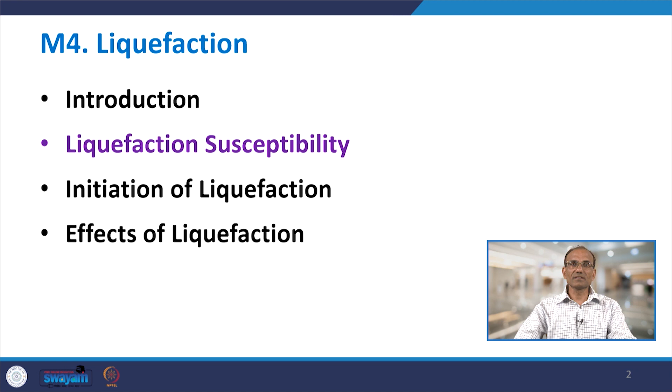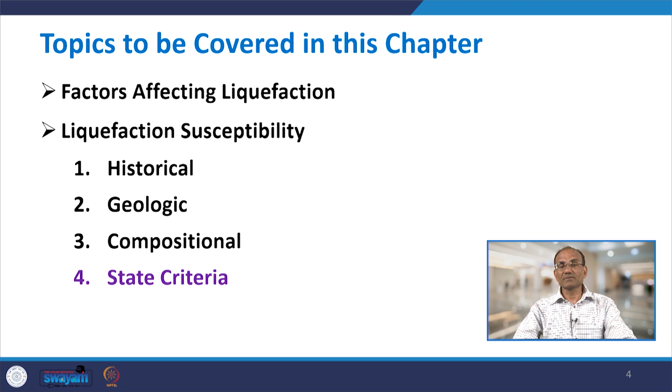We are going to discuss in detail the liquefaction susceptibility, continuing from lecture 32, where we discussed historical, geological and compositional criteria for liquefaction susceptibility. Today we will talk about the last criteria, the state criteria, which is more advanced, based on the state of the soil related to density and stress conditions. Most of what we discuss today is from Kramer's book, and many figures will come directly from this reference.

As for the state criteria, even if a soil meets all the historic, geologic and compositional criteria for liquefaction susceptibility, it is still not necessary that it will be susceptible to liquefaction. It may be susceptible or may not be. Those criteria only give a preliminary indication, but the state criteria will confirm to you whether the soil is susceptible or not.

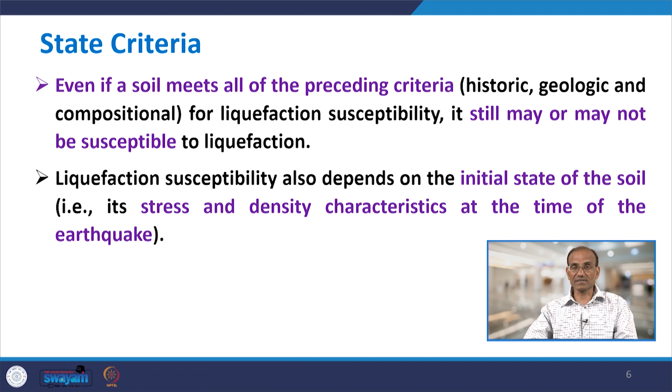Susceptibility does not only depend on the historic, geologic and compositional criteria, but also on the initial state of the soil. Initial state means the stress and density characteristics at the time of the earthquake. Whether the soil is loose or dense makes a difference, and similarly stress conditions will also govern whether liquefaction susceptibility is there or not.

This is the third lecture on liquefaction of soils. Basically, in liquefaction of soils there is generation of excess pore water pressure due to shaking, and this generation of excess pore pressure is very much influenced by density and initial stress conditions. Therefore, liquefaction susceptibility depends strongly on the initial state of the soil, which is related to two factors: stress condition and density.

Unlike other criteria discussed previously, these state criteria are divided into categories, different for flow liquefaction and cyclic mobility, which we will discuss in detail.

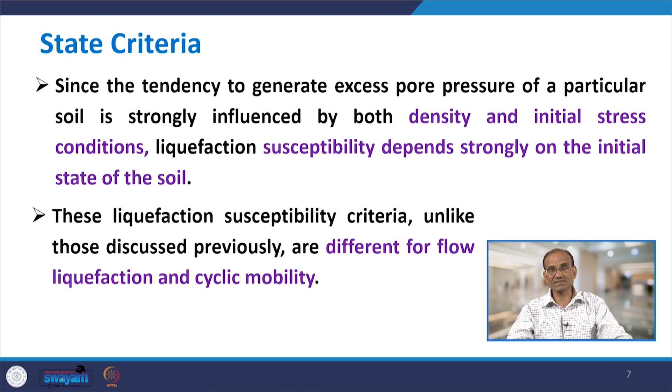Long back, Casagrande in 1936 performed many triaxial tests, which were strain controlled triaxial tests, drained, meaning drainage was allowed so pore water pressure did not develop, on initially loose and initially dense sand specimens. Two types of specimens were taken, one initially loose, another dense. Strain controlled means the maximum value of strain is fixed and not crossed.

The results are shown here: deviatoric stress versus axial strain. In triaxial testing, you may recall the deviatoric stress from when we discussed dynamic soil properties. Normally the triaxial sample is a cylindrical sample. Sigma c, the cell pressure, is applied all around, and in addition, deviatoric stress is applied in the axial direction.

The deviatoric stress is the difference between sigma 1 minus sigma 3, where sigma 1 is the major principal stress and sigma 3 is the minor principal stress. On the y-axis you have deviatoric stress sigma d, and on the x-axis, in the strain controlled test, you strain the sample at different strains. When you increase the strain for the dense and loose samples, the dense sand reaches a maximum peak deviatoric stress value, but the loose sand may not reach as high a peak.

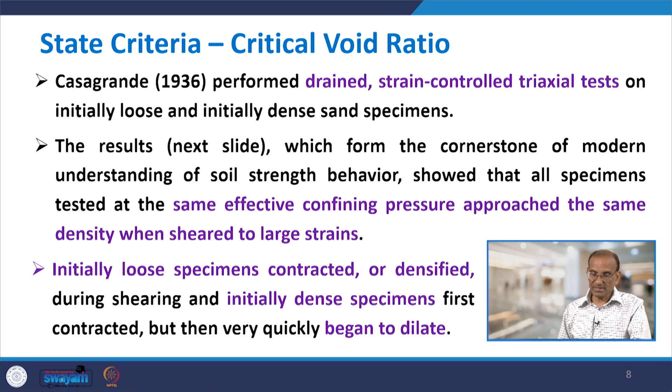So the term critical void ratio is the void ratio where, at a higher value of shear strain or axial strain, all the soil samples will reach to one void ratio, which you obtain at a high value of straining.

So EC is the same irrespective of whether the initial condition is loose or dense. This is the critical void ratio, sometimes called in short CVR, and we will discuss later what is the CVR line. So CVR stands for critical void ratio.

At large strains, all specimens approach the same density and continue to shear with constant shearing resistance, as we discussed in the last slide. The void ratio corresponding to this constant density was termed the critical void ratio, EC. By performing tests at different effective confining pressures, Casagrande found that the critical void ratio was uniquely related to the effective confining pressure, and called the locus the critical void ratio line, the CVR line.

What is the CVR line? There is one critical void ratio EC, but this critical void ratio is not constant—rather it depends on the confining pressure.

Here what I could say is that this test has been conducted at a particular confining pressure in the triaxial, sigma c is constant. But suppose for the same soil I conduct the test at different confining pressures, then the value of EC which I will obtain will be different.

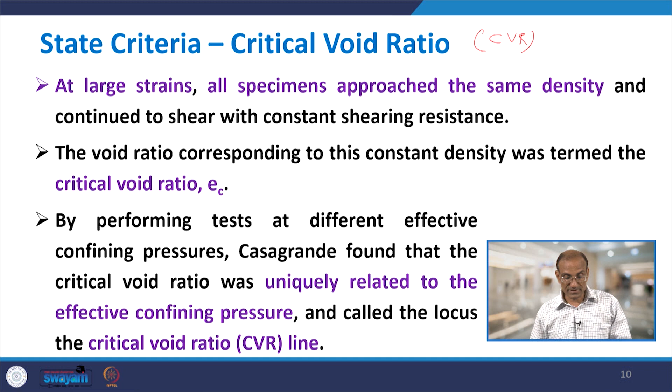So the EC for dense and loose sand may be the same, however it will depend on the confining pressure. The locus of the points, if I plot a curve of EC versus confining pressure, that line is called the CVR line, and the CVR line is given here.

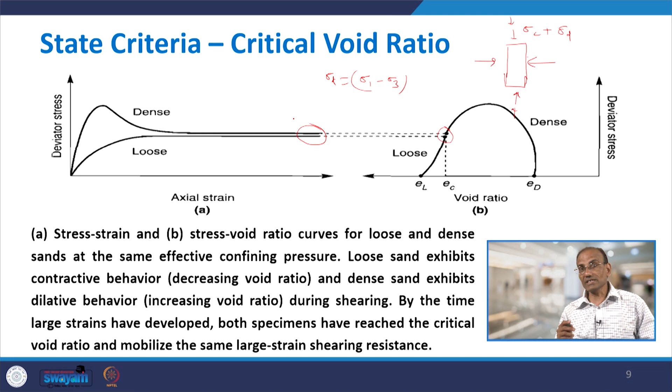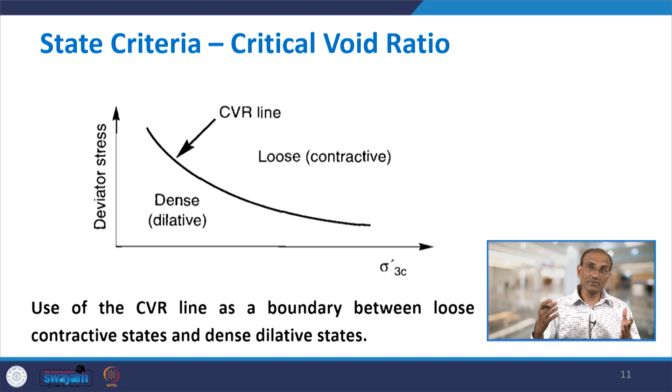This CVR line is used in many cases as a boundary between the loose contractive state and dense dilative state. So if you are lying below the CVR line, then your sample will be dense, and a dense sample will expand when you apply straining—it will dilate. While above it, you have the loose sample, where it will contract when you give shaking to it.

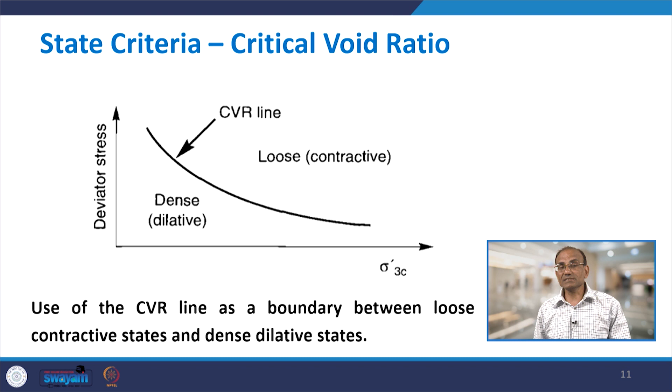So ultimately both dense and loose samples will try to reach near the CVR line—the dense sample will come upward and the loose sample will come downward. So we continue with the CVR; we use this one to define the state of the soil in terms of void ratio and effective confining pressure.

The CVR line could be used to mark the boundary between states, as we already discussed. The equipment needed to measure the pore water pressure was not available at the time. As a result, Casagrande hypothesized that strain controlled undrained testing would produce positive excess pore water pressure, that is, tendency for contraction. So here is the point.

The test which we discussed was a drain test, because if you recall, this was drain test initially. It was conducted as a drained test because at that time there was no equipment to measure the pore water pressure.

However, there was a hypothesis that during strain controlled test, if conducted in undrained condition, there will be development of positive excess pore water pressure. This positive excess pore water pressure will be developed for the loose sample which has tendency for contraction, while negative pore water pressure will develop for the dense specimen, which has the tendency to dilate.

So, the loose sample will contract, and the dense sample will dilate. Positive pore pressure develops in case of the loose sample if you do not allow drainage, that is, undrained condition. So in undrained condition there will be development of pore water pressure, and this development is termed excess pore water pressure, EPWP.

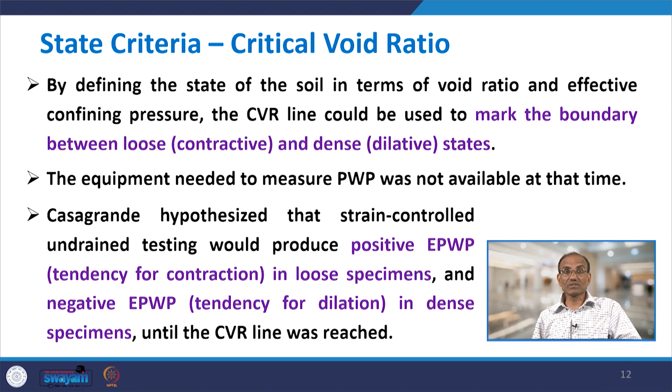This development of excess pore water pressure depends on the initial density of the soil. That is the point here. So now, these are the results.

In the first case, both graphs A and B are the same, only what is the difference? In case A, the x-axis sigma 3c is on the normal scale, while in B it is on the logarithmic scale. So if you change the x-axis to logarithmic scale, instead of a curve you get a straight line, and this is nothing but the CVR line.

So both A and B represent the CVR line. Now, whether we are above or below the CVR line, the coordinate of the loose sample will come above the CVR line, and the dense sample will be below the CVR line. This shows the behavior of initially loose and dense specimens under undrained condition.

So whether you allow drainage or you do not, let me explain. For the loose sample, there are two paths. One path: you do not allow the drainage, that is, undrained condition. When you do not allow drainage in undrained condition, there will be no change in volume.

That means the void ratio E is going to be constant. So in undrained condition, you move along the position where E is constant. Since it is a loose sample, there is development of positive pore water pressure, so your effective confining pressure sigma 3c will decrease. The path for the loose sample in undrained condition will be shown by these arrows.

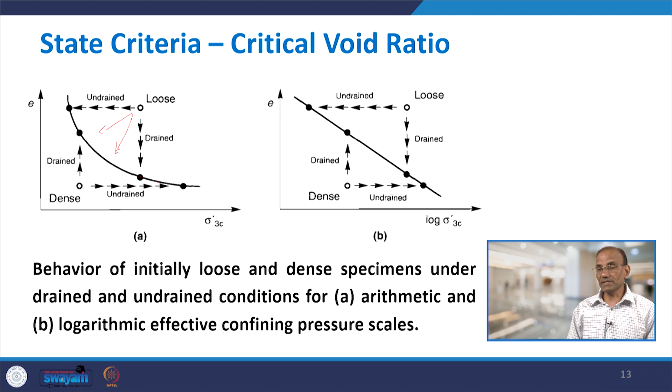So suppose here in one case it is undrained condition, and in another it is drained condition. If you allow partial drainage, then it will not be a horizontal or vertical line; rather you will move along some path, maybe like this, or like this, or maybe like this, depending on whether you are allowing partial drainage or partial development of pore pressure.

So, continuing with the CVR: since the CVR line marked the boundary between contractive and dilative behavior, it was considered to mark the boundary between states in which a particular soil was or was not susceptible to flow liquefaction. As we said, if your sample is loose, chances are it may be susceptible to liquefaction. So the CVR line definition comes with respect to confining pressure — whether it is loose or dense is not unique, but depends on the confining pressure.

So confining pressure needs to be defined. Saturated soils with initial void ratio high enough to plot above the CVR line were considered susceptible to flow liquefaction, and soils with initial states plotting below the CVR line were considered non-susceptible. So what we are talking about here is flow liquefaction.

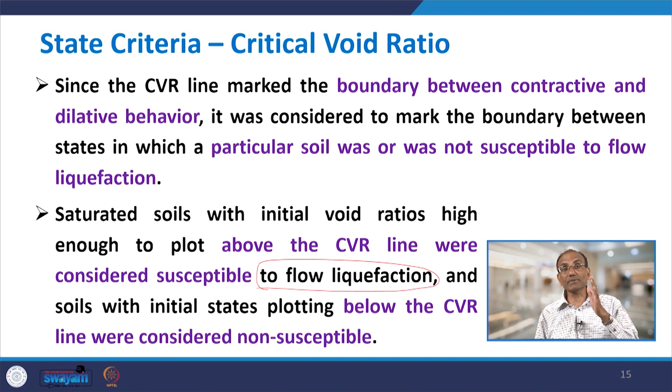I think you should keep in mind that this condition we are putting is for flow liquefaction, not for cyclic mobility. As we said at the start of this lecture, these conditions will be set differently for cyclic mobility versus flow liquefaction. So if your sample is plotting above the CVR line, it will be susceptible, but if it is plotting below, it will not be susceptible — and this susceptibility is with respect to flow liquefaction. So this is what we have discussed: susceptible, not susceptible, and how the CVR line can be used.

So this was about the CVR line. Now, in this lecture today, we are going to talk about the second concept. The first concept was related to the CVR line, which determines the susceptibility of the soil sample. The second is steady state of deformation, which is more advanced than the CVR; the CVR line concept came from Casagrande.

Castro, in 1969, performed static and cyclic triaxial tests on isotropically consolidated specimens, and several static tests on anisotropically consolidated specimens. So triaxial static and cyclic tests were conducted on isotropic specimens, while static tests were on anisotropically consolidated specimens.

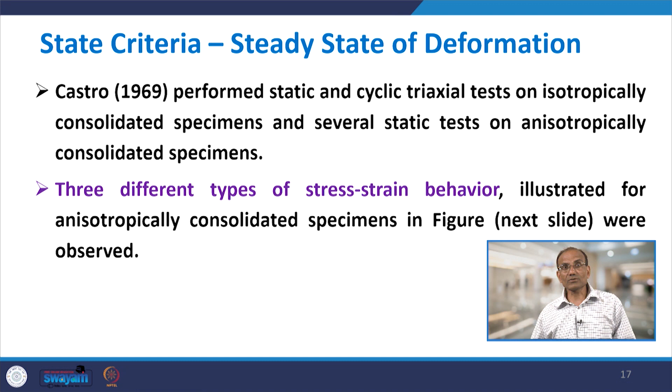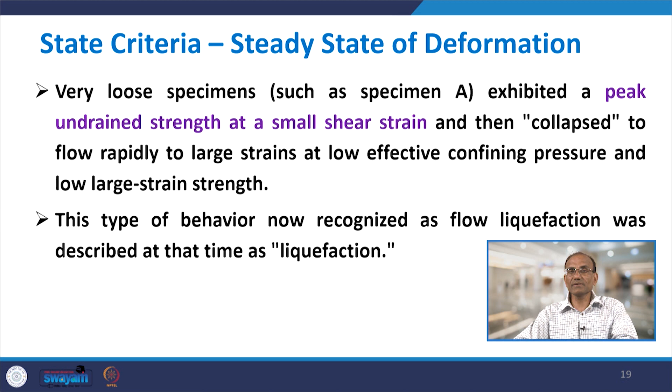In the case of a dense specimen, specimen B initially contracted only a little but then dilated until reaching a relatively high constant effective confining pressure and large strain. If you have intermediate densities, that is specimen C, the result combines behavior from A and B, with a limited period of strain softening that ends once dilation takes place.

This reversal from contractive to dilative behavior occurs at the phase transformation point. The phase transformation point is where the sample first contracts and then starts dilating.

As a result, positive pore pressure develops for some time up to this point, and then starts decreasing, and after the phase transformation point negative pore pressure develops because dilation takes place. This happens because most samples fall between loose and dense.

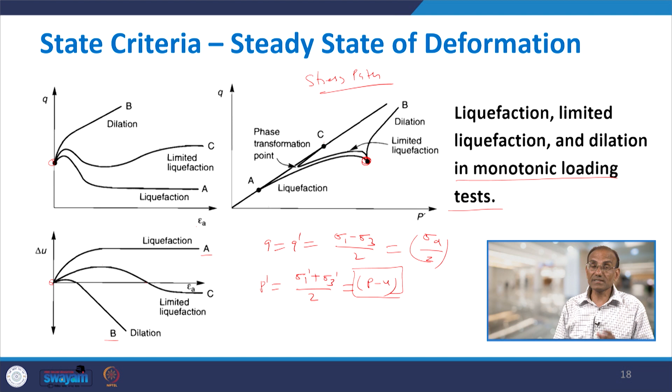Let us work on this case C. The loading produces continued dilation to higher effective confining pressure and higher large-strain strength. This type of behavior was termed limited liquefaction.

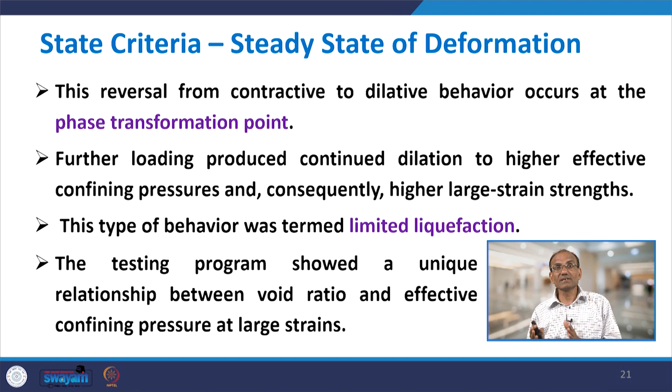Continuing with this, the testing program has shown a unique relationship between void ratio and effective confining pressure at large strain, and this kind of relationship also existed for the case of the CVR line, as we discussed earlier.

Graphically, this relation is plotted below, roughly parallel to the CVR line, which is the same case obtained from drained strain control tests, the difference being attributed to the development of flow structure under stress control conditions.

So here, we are doing it under stress control. The state in which the soil flowed continuously under constant shear stress, constant effective confining pressure, constant volume, and constant velocity is defined as the steady state of deformation. This is very important, how we define steady state of deformation.

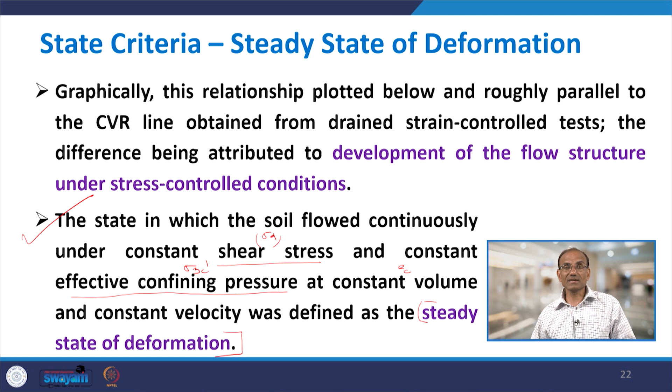The definition of steady state of deformation is: this is the state of the soil in which soil flows continuously under constant shear stress—meaning you fix the value of shear stress, sigma d is constant—at constant effective confining pressure, meaning sigma 3c is constant, and constant volume, meaning you fix the value of E, which is at critical, and constant velocity. In that case, we say the soil has reached the steady state of deformation.

Since the steady state of deformation is reached only at large strains, after the effect of initial conditions such as soil fabric, stress and strain history, and loading conditions have died out, the effective confining pressure in an element of soil in the steady state of deformation was considered to depend only on the density of soil.

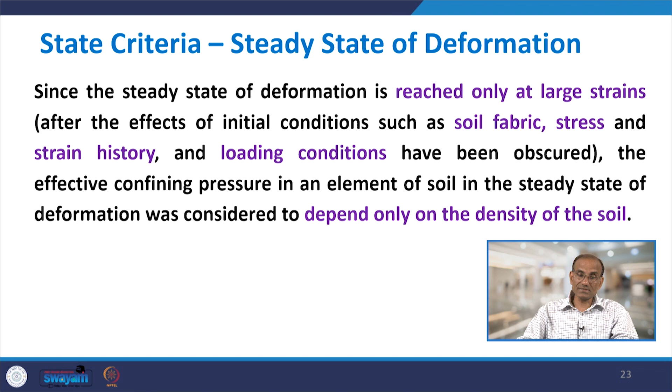So this will be reached whether you start with a loose sample or a dense sample. This is similar to what we have in the case of the CVR line, but it is more advanced compared to the CVR line.

Now, the locus of points describing the relation between the void ratio E and effective confining pressure in the steady state of deformation is called the steady state line. In general, it looks like the CVR line, but in the CVR line you plot the critical void ratio with respect to confining pressure. Here, we plot the relationship between the void ratio corresponding to the steady state condition and the effective confining pressure, and these coordinates of void ratio and confining pressure should belong to the steady state condition as we defined. So the locus of these points is called the steady state line.

In its most general form, the SSL can be viewed as a 3-dimensional curve. In the 3D case, you have three axes: one is void ratio E, another is sigma prime, the normal effective stress, and then tau, which is the shear stress. This is called the E, P, and Q space.

Basically, tau is replaced by Q, because tau and Q are nothing but sigma d by 2—shear stress is replaced by Q. If I don't have E, then P dash and Q define what is called the 2D stress path. So there could be a 2D version and a 3D version. Let us start from 3D and then we will come to 2D.

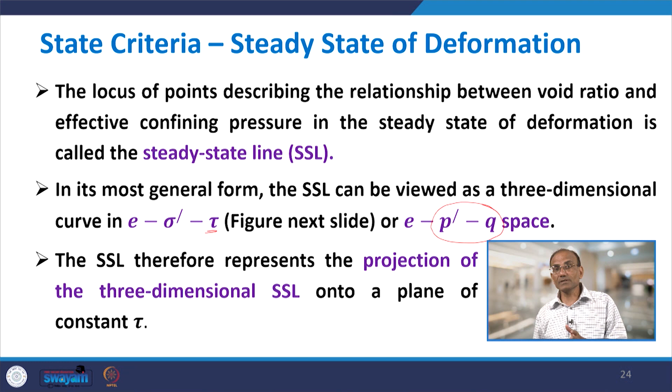The SSL therefore represents the projection of the 3-dimensional SSL into a plane of constant tau. If you keep one of them constant, you get the 2-dimensional version. In 3D, the SSL is denoted by a thick curve, with three axes: one is E, another is sigma prime, the effective normal stress, and on the vertical direction you have tau, which could also be replaced by Q—representing the same thing.

Now, if I draw the projection of this SSL line on different planes, for example on the horizontal plane which consists of E versus sigma, I get this projection on the E-sigma plane. Similarly, if you draw the projection on the E-tau plane, you get this curve. And if you draw the projection on the tau-sigma plane, you get a straight horizontal line. So different projections can be drawn and worked with.

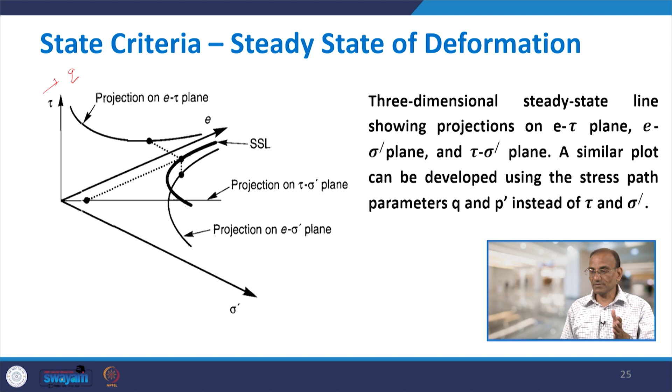But since it will be difficult to deal with the 3-dimensional case, for simplicity we will work with the 2D SSL.

The SSL can also be projected, as we already discussed. It can also be expressed in terms of what we call the steady state strength, SSU. Since the shearing resistance of the soil in the steady state of deformation is proportional to the effective confining pressure, which we have also discussed, the strength-based SSL is parallel to the effective confining pressure based SSL when both are plotted on the logarithmic scale.

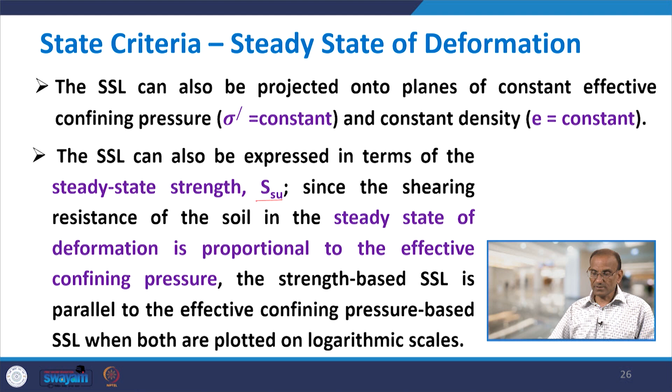Both are more or less similar. One thing is important here: if you recall the CVR line, you have the same axes, like A, E was on one axis and confining pressure on the other. Then what is the difference? The difference is that in this case, the locus of points belongs to the steady state condition. So we need to make sure these points are related to the steady state condition.

The steady state line, like the CVR line, is useful for identifying the conditions under which a particular soil may or may not be susceptible to flow liquefaction. Soils whose state plots below the SSL are not susceptible to flow liquefaction. So for the flow liquefaction condition, it is a must that they plot above the SSL.

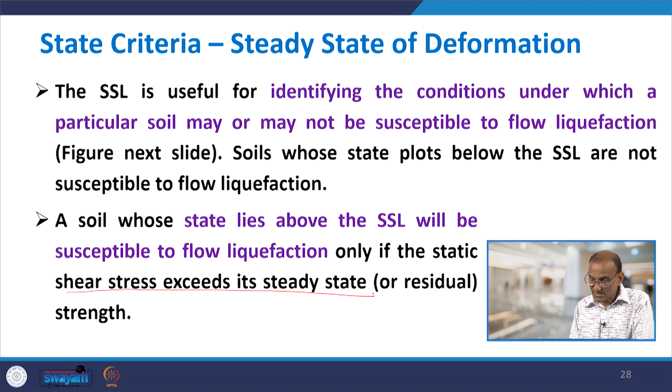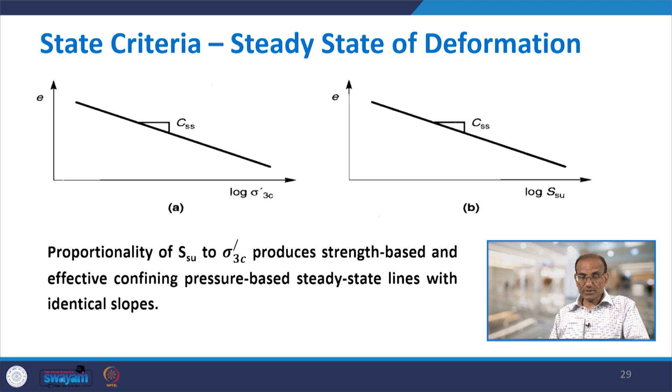So this is the case here, like you have... okay, so in this same slide, yeah, this is the same slide we discussed last. So if it is plotting above or below this SSL, accordingly we can decide.

Since the SSL can be used to evaluate the shearing resistance of liquefied soils, it is also useful for evaluating the effects of liquefaction. Although determination of the position of the SSL can be difficult in practice, once the SSL is ready, it is quite useful for understanding the basis of liquefaction.

Then the second phenomenon, which we did not discuss when we talked about the CVR line, is cyclic mobility. Cyclic mobility can occur in soils whose state plots above or below the SSL. In other words, cyclic mobility can occur in both the loose and dense end. So for flow liquefaction, the condition must be that it plots above the SSL, but for cyclic mobility, it can plot either above or below the SSL.

The nature of the steady state line illustrates the limited applicability of absolute measures of density, such as void ratio and relative density, for characterization of a potentially liquefiable soil.

As shown in the next figure, an element of soil at a particular void ratio, hence a particular density and relative density, can be susceptible to flow liquefaction under a high effective confining pressure, but non-susceptible at a low effective confining pressure.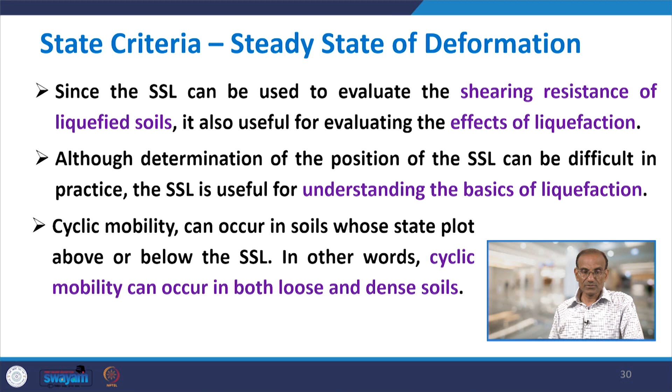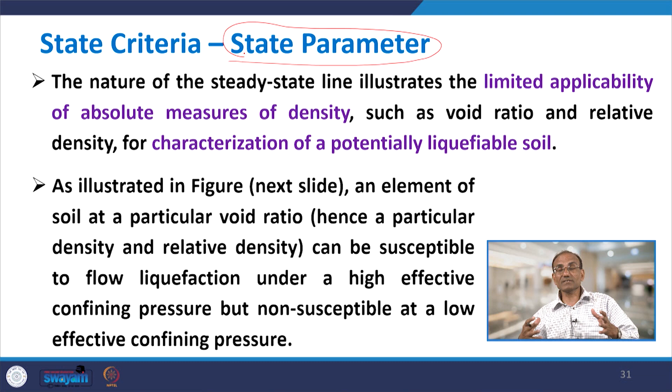This is explained using what we call the state parameter. What we are discussing here is the state parameter, and what actually happens is that we try to compact everything we discuss into one single parameter. What is that single parameter? That can be explained using this.

Here SSL we already defined in the last slides. What is SSL? It is E versus logarithm of sigma 3c, which looks similar to the CVR line, but it is in a steady state condition.

If this parameter psi is positive, then the chances of liquefaction will be there. If psi is negative, then it will not liquefy, rather it will be stable. So depending on whether this parameter is positive or negative, liquefaction susceptibility can be defined. This psi is called the state parameter.

This state parameter is used for determining susceptibility to liquefaction. Using the concept of critical state soil mechanics, the behavior of a cohesionless soil should be more closely related to the proximity of the initial state than to the absolute measure of density. In other words, soils in states located at the same distance from the steady state line should exhibit similar behavior, and the state parameter was defined accordingly.

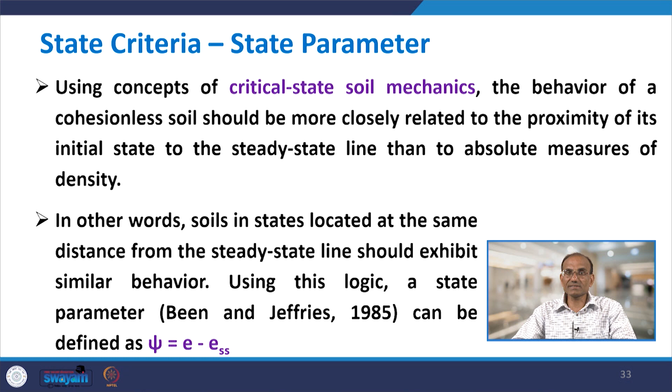This state parameter was defined by Been and Jeffries as psi, which is nothing but E minus ESS. If E is greater than ESS, psi will be positive; if E is less than ESS, it will be negative. Here ESS is the void ratio of the steady state line at the effective confining pressure of interest.

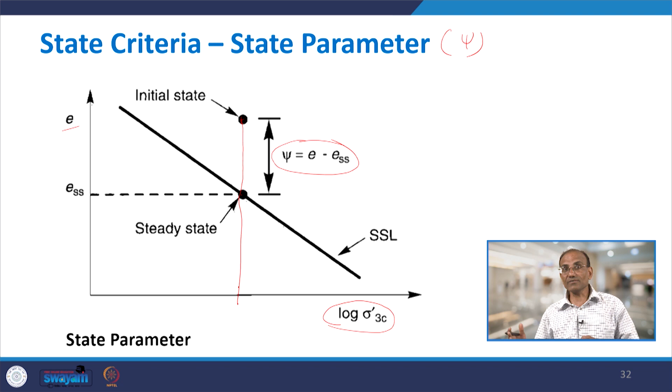Naturally, the value of ESS is not constant; it keeps changing with void ratio. So whenever we determine the state parameter, we need to keep the same confining pressure for both points. If we change the confining pressure, then the ESS value will also change, so this needs to be determined carefully.

When the state parameter is positive, the soil exhibits contractive behavior and is susceptible to flow liquefaction. When it is negative, dilative behavior occurs, and the soil is not susceptible to flow liquefaction.

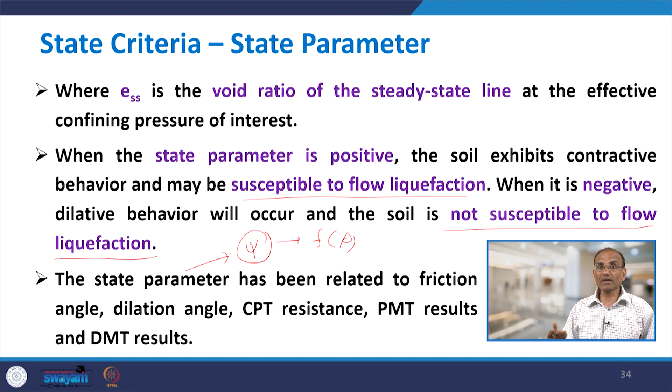We already discussed that this has been related to friction angle, dilation angle, CPT resistance, PMT results, and more. This state parameter psi has been linked with many properties - it could be linked with the friction angle phi, or with the SPT resistance N values, or CPT resistance or other results. Then accordingly, liquefaction potential could be assessed.

Ishihara in 1993 showed that the ability of the state parameter to characterize soil of very loose state under low effective confinement may be limited, and proposed an analogous parameter, the state index, based on the relative distance between the initial state and the quasi steady state.

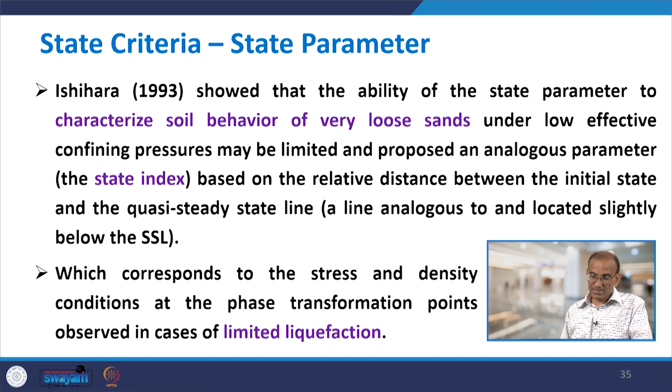As we discussed at the beginning on soil liquefaction, there is some controversy on this topic. The state parameter was established, but some exceptions have been found where this state parameter is not able to predict liquefaction. This corresponds to the stress and density conditions at the phase transformation points observed in cases of limited liquefaction.

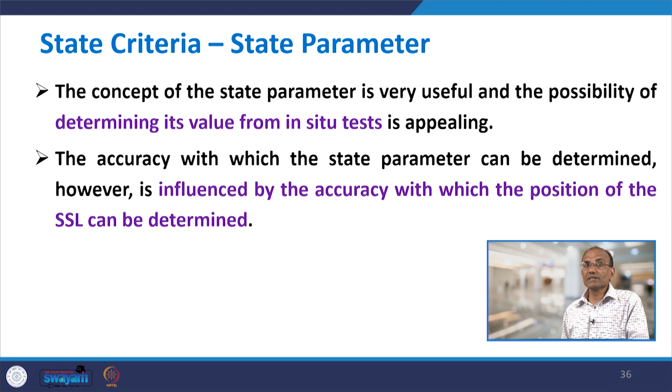The concept of the state parameter is very useful, and the possibility of determining its value from in-situ tests is appealing - once you have the in-situ test data, SPT data, or angle of internal friction phi, you can find the value of psi, the state parameter, and determine whether liquefaction will occur or not. The accuracy with which this can be determined is influenced by the accuracy with which the position of the SSL can be determined.

So with this I conclude this lecture, the 33rd lecture, and this was the second lecture on liquefaction susceptibility. With this we conclude liquefaction susceptibility. Thank you very much for your kind attention.